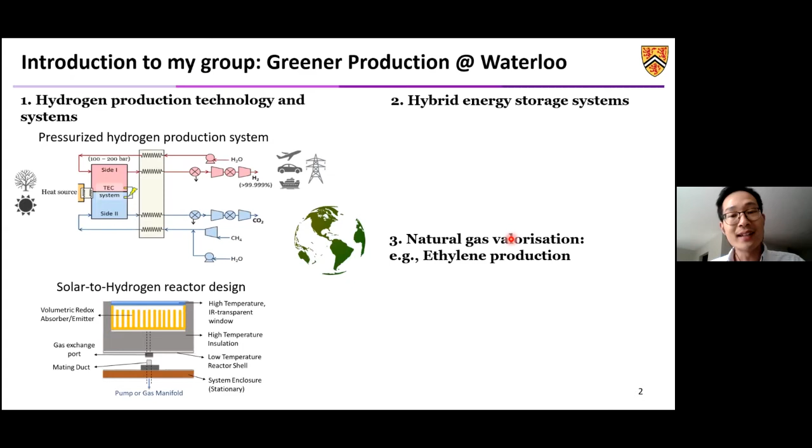And another topic that we are currently working on is hydrogen and hybrid energy storage systems. In this project, we are looking at using a hybrid storage solution combining battery and hydrogen to store variable renewables, for example, solar and wind, so that we can stabilize the grid as well as provide greener solutions for the consumers. And the third topic that we are working on is natural gas valorization. In this topic, for example, we are converting natural gas into ethylene so that we can decrease the energy consumption as well as increase the selectivity for ethylene production using methane oxidative coupling in a membrane reactor.

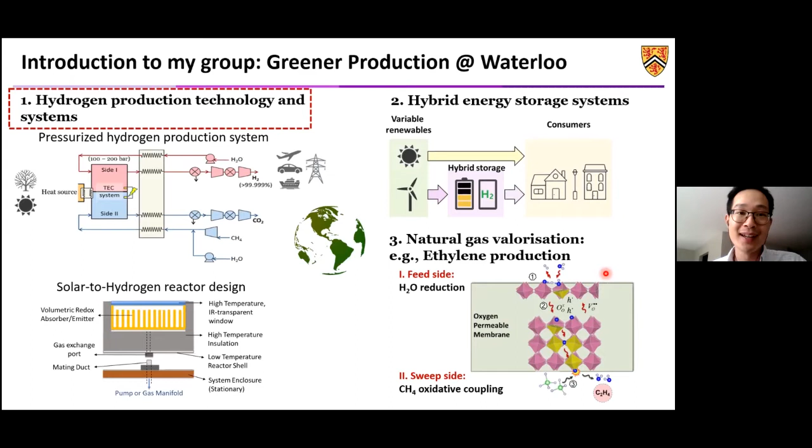In today's talk, we're focusing on the first topic, which is the hydrogen production technology and system, and I'll tell you more about how we use an oxygen permeable membrane to enhance hydrogen production from water. Why are we talking about hydrogen these days? Because more and more attention is now on hydrogen. Recently, if you're following the energy news, you know that Germany will release this 9 billion euro plan to use hydrogen to recover their economy. And also in the US and in Europe, they are developing hydrogen strategies or hydrogen roadmaps for economic development.

And in Canada, we are also developing a national hydrogen strategy, which could be different from the US because the US is looking at hydrogen from their coal. But here in Canada, we have a lot of renewable electricity, and we also have a lot of fossil energy. So that will be a great chance for us to use these energy resources to produce hydrogen for the economy. However, hydrogen's role as an energy carrier is not a very new topic. It's more than 100 years old.

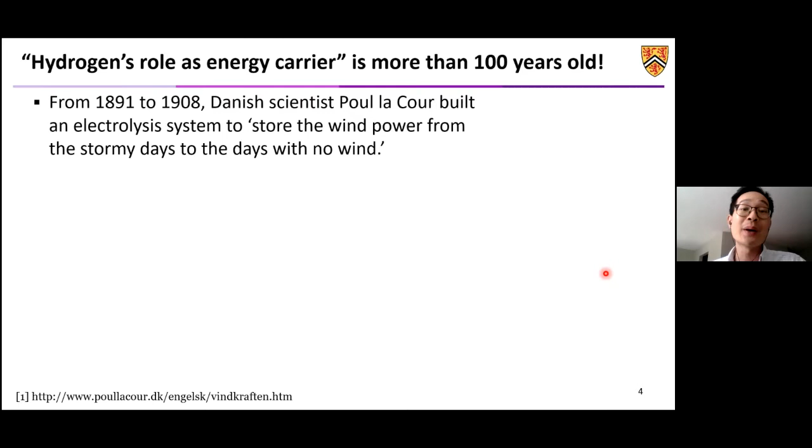From the 1900s, the Danish scientist Poul la Cour was actually the first one to build an electrolysis system to store wind power on stormy days so that they could use this hydrogen to power some systems on days without wind. Here is a historic photograph of this electrolysis cell in the basement below a wind turbine. 10 of these tubs were built. On a windy day, they could produce around 1,000 liters of hydrogen and 500 liters of oxygen per hour. That is around a 3 to 4 kilowatt system that was built in Denmark.

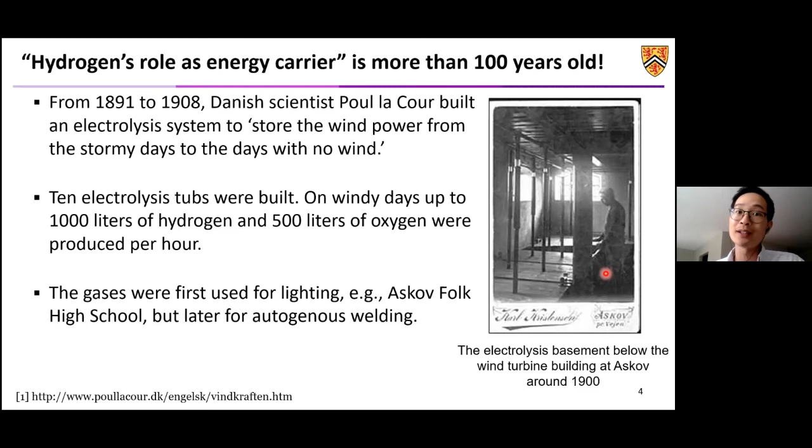And these gases were stored and then used, for example, in lighting, which is commercial use, as well as for welding. So they could use this stored hydrogen for commercial energy supply as well as industry. This inspired a British scientist called Haldane, who hypothesized a new type of system with different power stations located at suitable distances, so they could convert the excess wind energy to hydrogen, store the hydrogen in these power stations, and then convert it back into electricity when there's no wind.

And this further inspired another professor in the US, who was the first one to use the term hydrogen economy in the 1970s. Professor Bockris at TAMU in the United States envisioned that the US could be supplied solely by solar energy with hydrogen storage.

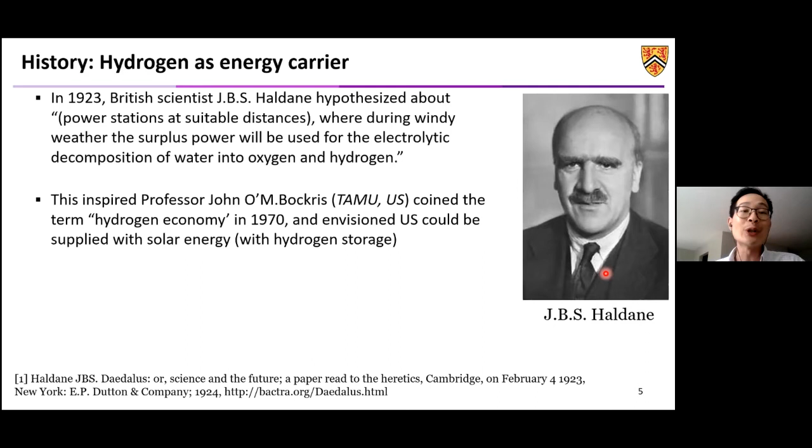From that time on, we know more about hydrogen in the energy carrying industry as well as different renewable energies industry. So that's why there are more and more hydrogen products coming to the market. For example, Germany in the 1990s actually had the first solar power hydrogen production plants. And later we see hydrogen fuel cell cars as well as hydrogen fuel cell buses running around the globe. And also in 1999, Europe had the first hydrogen fueling station in Germany.

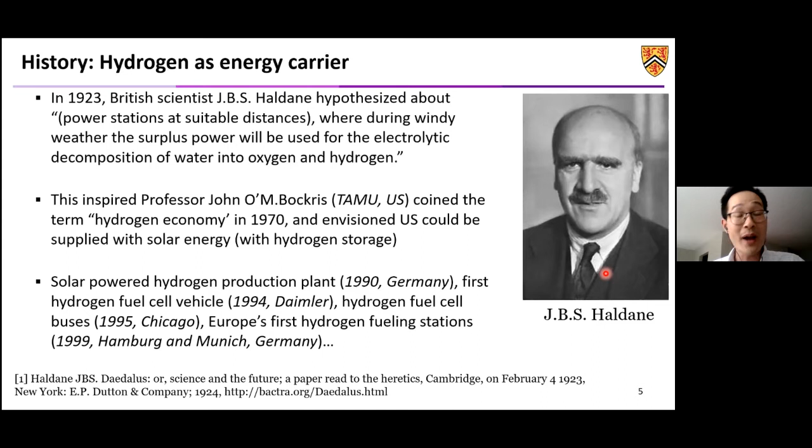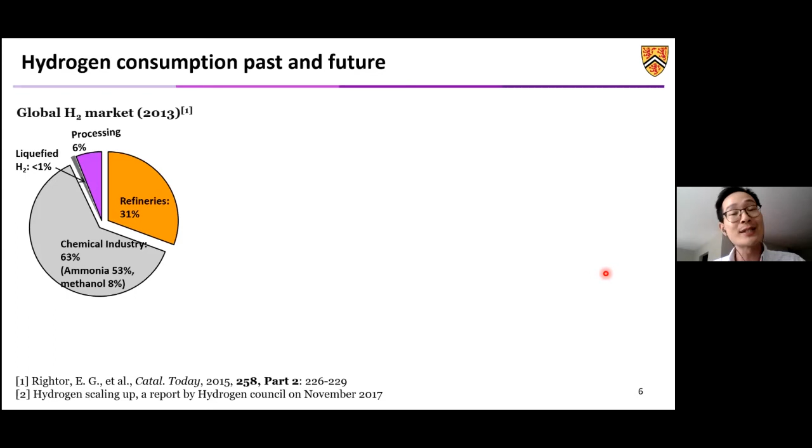However, since we're talking a lot more about renewable hydrogen these days, people envision that in the near future, 30 years from now, the hydrogen market can increase around 8 times, from 10 exajoule to around 80 exajoule. Hydrogen can be used for power generation, energy storage, transportation, for example fuel cell cars, trucks, trains, etc. And also to provide energy for industry, for buildings, as well as new feedstocks for advanced technologies in the chemical industry. So there is great potential for hydrogen in this market in the near future.

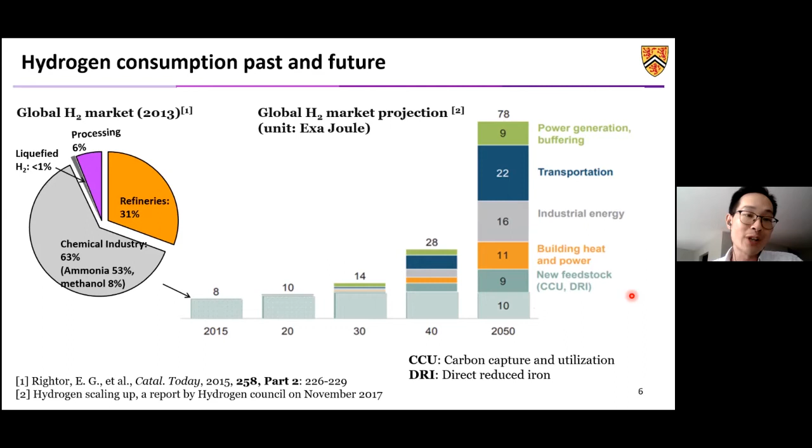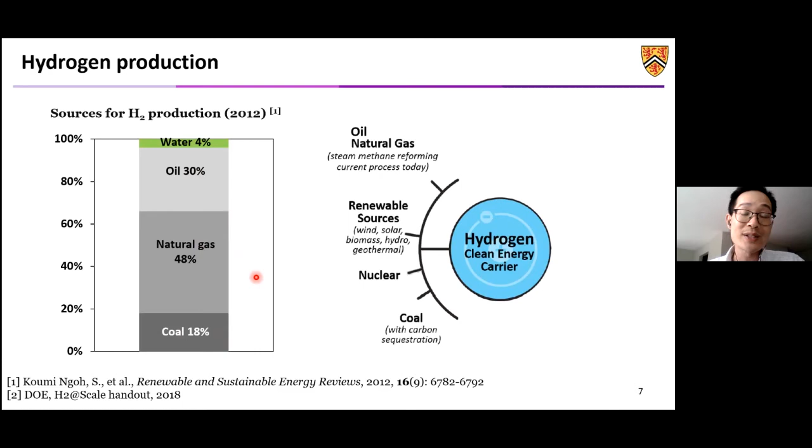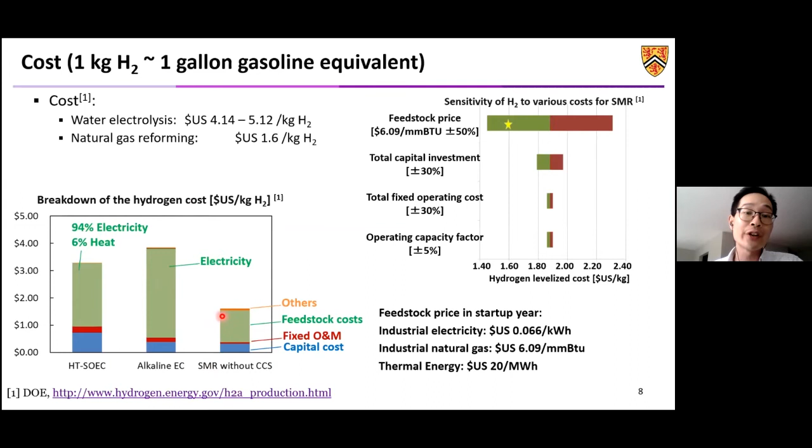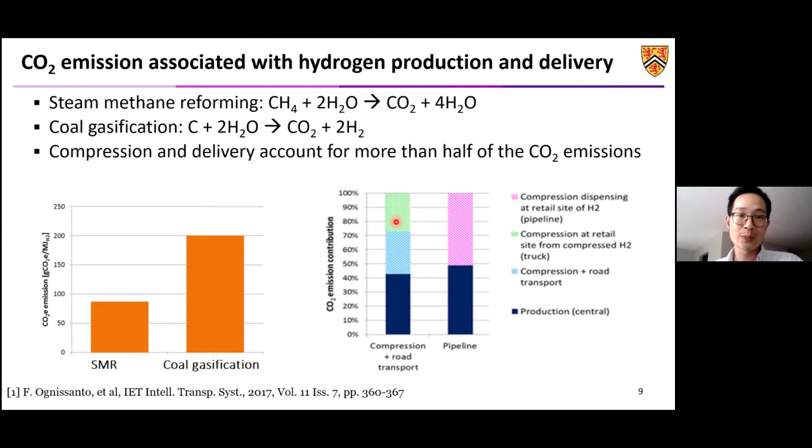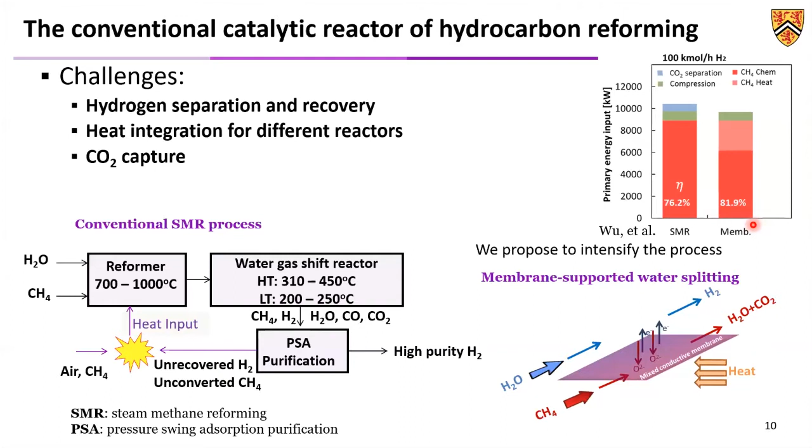We did some analysis to compare these two processes for hydrogen production, which is shown in this graph. Here you can see that by process intensification in this membrane, we can actually increase the efficiency from 76% to 82%, which is a 6 percentage point increase. So you might be wondering, what is this magical membrane? So now let's zoom in to look at this membrane.

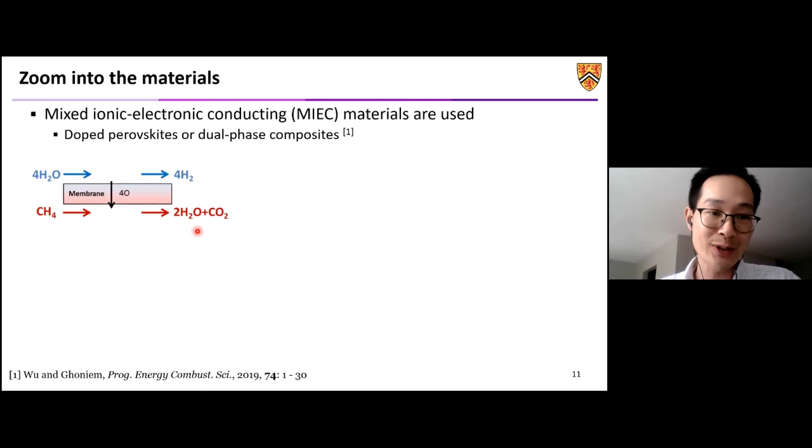This membrane that we're using is a mixed ionic electronic conducting material, which is usually doped perovskites or dual phase composites. So here's the process again: we have water producing hydrogen and oxygen. Oxygen diffuses through this membrane and then reacts with the methane to produce water and CO2. If you look at this membrane, it's actually a dense membrane, so there are no pores. That's why we can achieve very high selectivity of oxygen permeation. Only oxygen can permeate through this dense membrane in the form of oxygen ions.

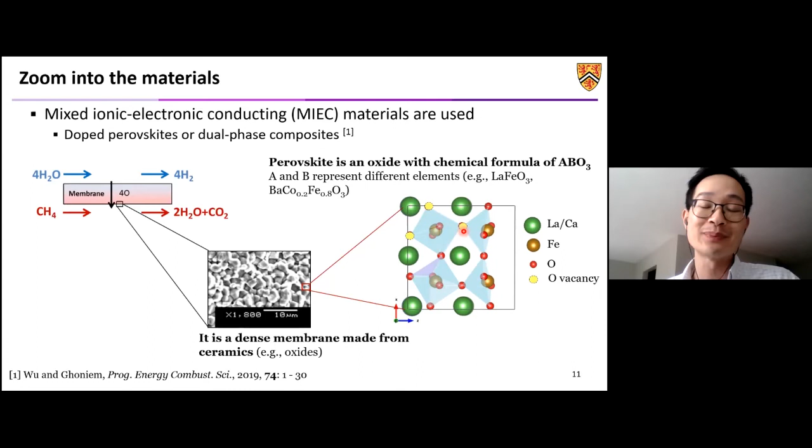If you look at the entire process, we can separate it into 5 different steps. The first step is that water vapor diffuses to the surface of the membrane. After that, the oxygen from the water reacts with the oxygen vacancies to form lattice oxygen, while the hydrogen is produced on this side and diffuses away from the surface. Once the lattice oxygen is formed, it diffuses through this membrane to the other side, driven by the chemical potential gradient, by hopping from one vacancy site to the other.

After that, this oxygen reacts with the methane to form CO2 and water, and that's when we can capture the CO2 very easily from the methane side. As I mentioned, this process is driven by the chemical potential gradient. On the water side, we have very high chemical potential, with high partial pressure of oxygen. On the methane side, we have very low chemical potential and a very low partial pressure of oxygen. Because of this, the oxygen vacancies diffuse through this membrane from the sweep side to the feed side, while the lattice oxygen diffuses from the feed side to the sweep side.

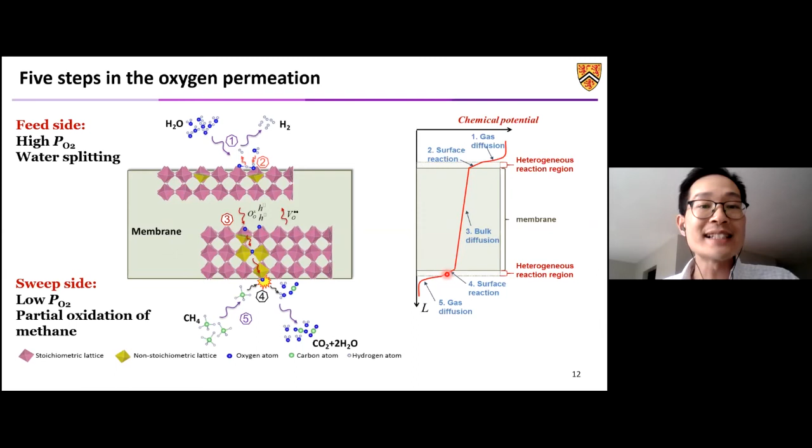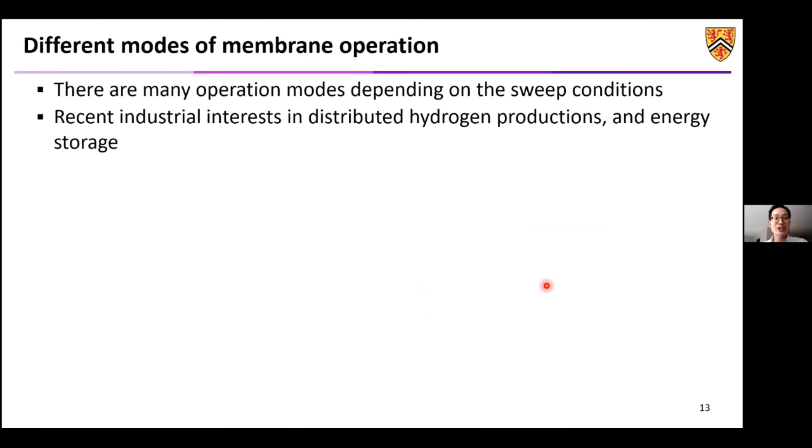So this is how it works in this membrane reactor. And since this is an oxygen permeable membrane, actually there are different types of operation modes depending on the sweep side. And it can be applied, for example, into distributed hydrogen production or as an energy storage technology.

So the first mode is the hydrogen-oxygen production. In this case, we have hydrogen, which is produced from water splitting. The oxygen diffuses through this membrane, and this is driven by a vacuum. So we lower the partial pressure of the sweep side by using a vacuum, so we drive the oxygen to diffuse from the water side to the oxygen side. So in this case, we can produce hydrogen and oxygen.

And if you don't want to use a vacuum because sometimes it's too energy intensive, you can also use an inert gas, for example, CO2 or another type of inert gas. You can use this as a sweep gas to sweep away the oxygen from the membrane surface to create a low partial pressure on that side for the diffusion. And again, this is also a hydrogen and oxygen production mode.

And also, since we have an oxygen source, we can control the oxygen partial pressure, and we can control the oxygen flux to react with the methane so that we partially oxidize this methane into hydrogen and CO, which is the syngas, to further produce methanol, for example. And in this case, we can co-produce hydrogen and syngas in this membrane.

And if you just want hydrogen, you can fully oxidize this methane by continuing flowing this methane and continuing utilizing this oxygen. So in this case, you can see that for 1 mole of methane, we can produce 4 moles of hydrogen, pure hydrogen from the water side. And then the methane is fully oxidized, and we can capture the CO2 from the methane in this case.

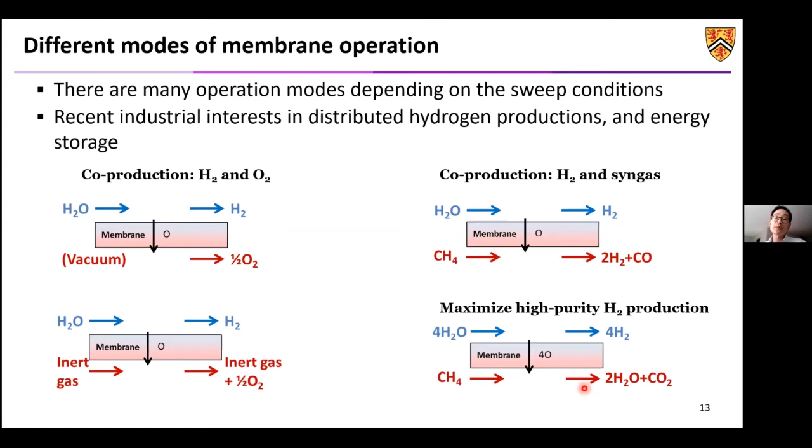And since we are utilizing this as a fuel or as a reactant that will react with the oxygen, we can use different types of fuels. For example, in this talk, I'm going to talk more about how we integrate this with coal gasification plants to utilize the gasification product, which is syngas, and to produce high purity hydrogen in this mode.

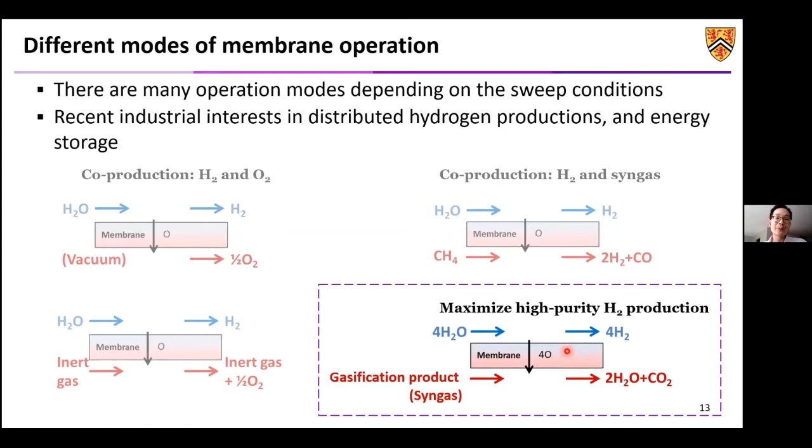So before we move on, I'll first introduce the gasification plant and what it is. Here it shows a schematic of the integrated gasification combined cycle, IGCC, plant with carbon capture. This is a clean technology to utilize coal, where we can capture the CO2 in a more efficient manner. And here the schematic shows that we have coal slurry that is fed into the gasifier to produce the raw gas at high temperature and high pressure.

And the raw gas is a mixture of very different gases, but it's very reducing. You can see that 35% of this is CO and 34% of this is hydrogen, and also some impurities from the coal. And after that, this raw gas will be cooled down, and then the dust will be separated and it will be fed into a water gas shift reactor to increase the hydrogen production.

And after that, the CO2 will be separated by this two-stage Selexol process for the CO2 compressor, and also the hydrogen sulfide from the process will be separated to produce sulfur in the Claus plant. So after this Selexol process, we have a clean stream of hydrogen, which will be fed into the combined cycle. So we'll have a gas turbine running at high temperature, and then we'll use a heat exchanger to run the bottoming Rankine cycle so that we can increase the efficiency of the entire coal power plant.

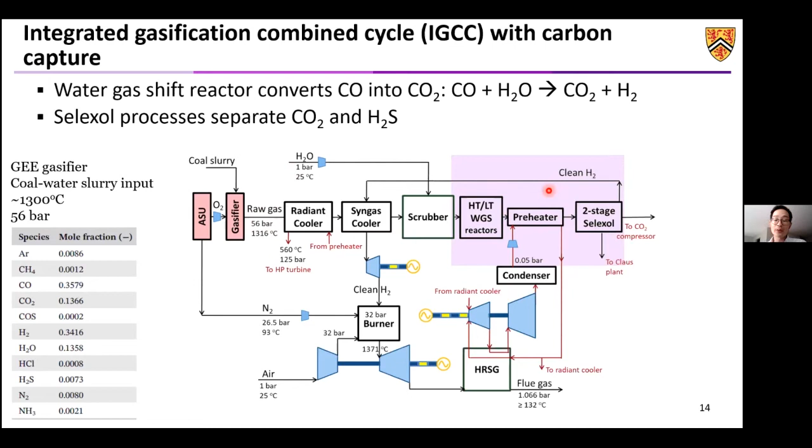So in order to improve the efficiency, especially for hydrogen separation from CO2, we propose to use this membrane. So in this case, we have this oxygen membrane reactor. On one side, we have the water splitting to produce hydrogen. And on the other side, we use the gasification product, syngas, as the fuel so that we can consume the oxygen, and we can drive more hydrogen production.

And because we know that coal gasification has a lot of impurities, such as H2S, the membrane has to resist this type of poisonous impurities from the gasification products.

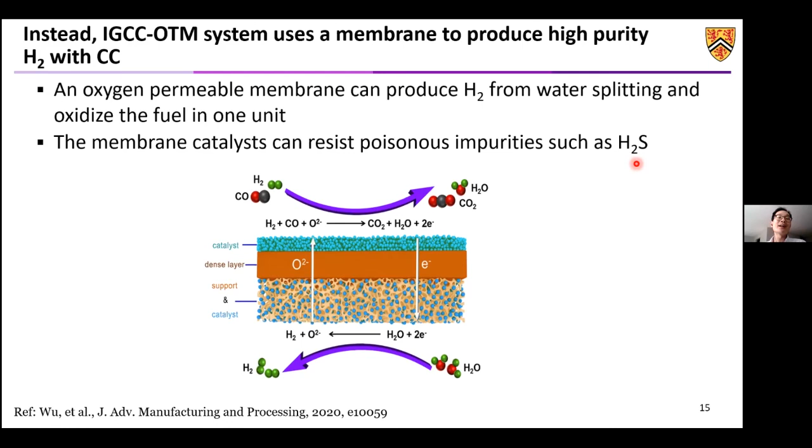So what it looks like in a system, it looks like this. In this case, we have this high temperature raw gas from the gasifier. It will go to this high temperature membrane reactor so that we can utilize the heat integration from the high temperature gasifier to the high temperature membrane.

Using this membrane, we can use the syngas from the gasification to produce water or produce hydrogen from water splitting. On side 2, the water splitting side, we produce pure hydrogen with water as a mixture. On side 1, we have the syngas reaction. The only addition to the plant is this isothermal high temperature membrane reactor, and also some post-processing units to increase the efficiency for the plant.

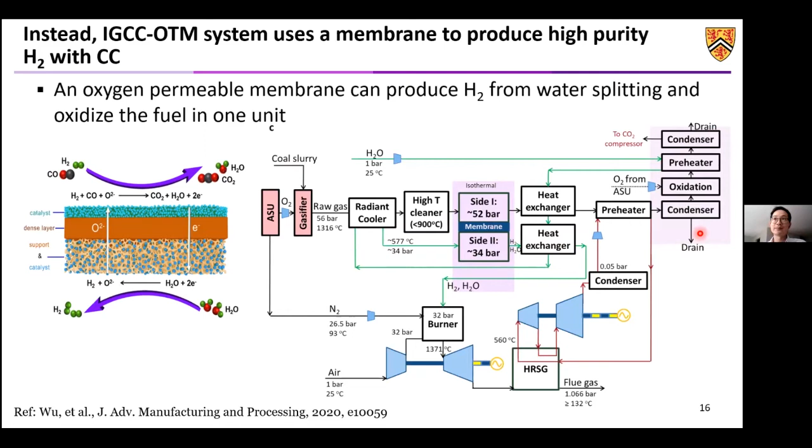So we use the counterflow configuration to maximize the conversion of this hydrogen. This is what we mean by counterflow: the syngas flows from the left to the right, but the water flows from the right to the left. The reason we want to use this counterflow is because, as I mentioned earlier, this process is driven by the potential gradients across this membrane. That's why we will have high oxygen partial pressure on side 2 and low partial pressure on side 1.

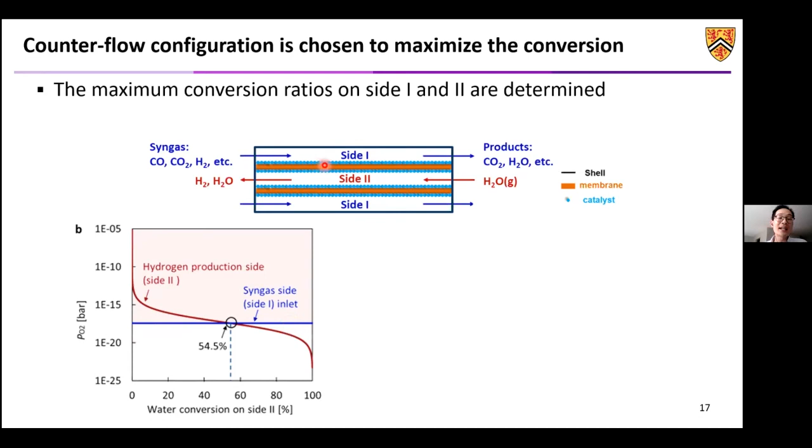The lowest partial pressure of oxygen on side 1 is at the inlet, which is plotted here. In order to make this membrane work, the side 2 partial pressure has to be above this blue line, so it has to be in this shaded region. We also know that when water is splitting, we are producing hydrogen, so the partial pressure of oxygen actually drops when the water is split. That's why we can decide what is the maximum water splitting ratio in our membrane reactor, which is around 55%.

On the other side, it's very similar. The maximum partial pressure is at the inlet on the water side, and the lower partial pressure is from the syngas side. But when the syngas is oxidized, the partial pressure of oxygen increases, as shown here. However, we can see that even though we have almost full conversion of the syngas into CO2 and water, we still have a potential gradient. That's why the syngas conversion ratio can be very high, as high as 99%.

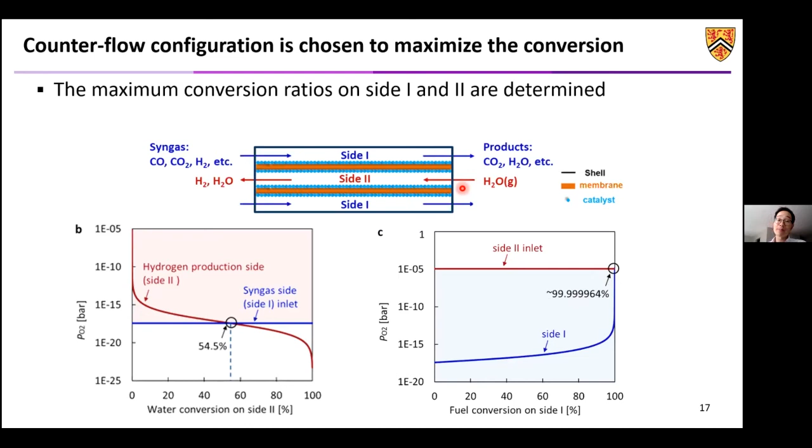After we know the maximum conversion in our reactor, we can build a model for this system. So we use Aspen to build this model to evaluate the performance of this new cycle. We define the first law efficiency of this plant as the net work output of the plant, electric output of the plant, over the heating value of the coal. The net work output is defined as all the work produced by the turbo machinery minus all the auxiliary consumption, such as pumps, CO2 compression, oxygen separation, the Selexol separation process, etc.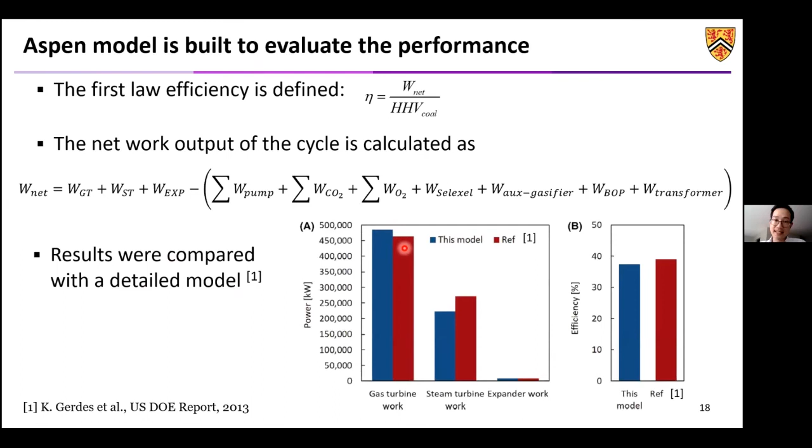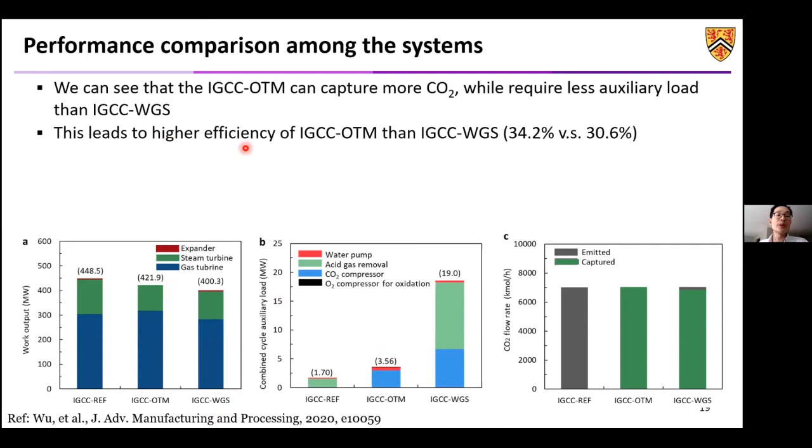That's why we can improve the efficiency of our plant. Also, because we decreased our auxiliary loads, our net work output compared with the conventional IGCC with CO2 capture can increase. That's why we can increase our efficiency from 30.6% to 34.2%.

We also calculate the energy consumption for CO2 avoided in our plant. We can see that our new designed IGCC OTM has an energy consumption almost 60% lower than the conventional IGCC with water gas shift reactor for CO2 capture. These results again convince us that this new design is actually working. We can utilize this IGCC OTM process to increase our electricity output, even when we are capturing the CO2.

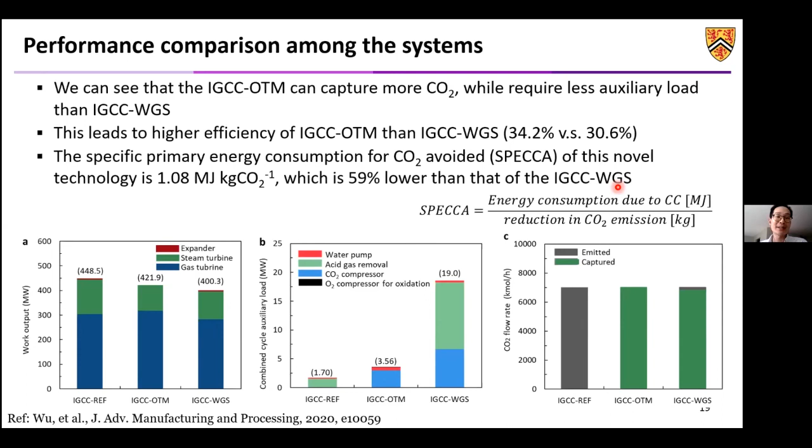Then you might be wondering whether this membrane actually works in reality. That's why in the lab we designed this type of membrane and tested it in a very similar environment, so that it can be very stable even though the environment is very reducing as well as corrosive.

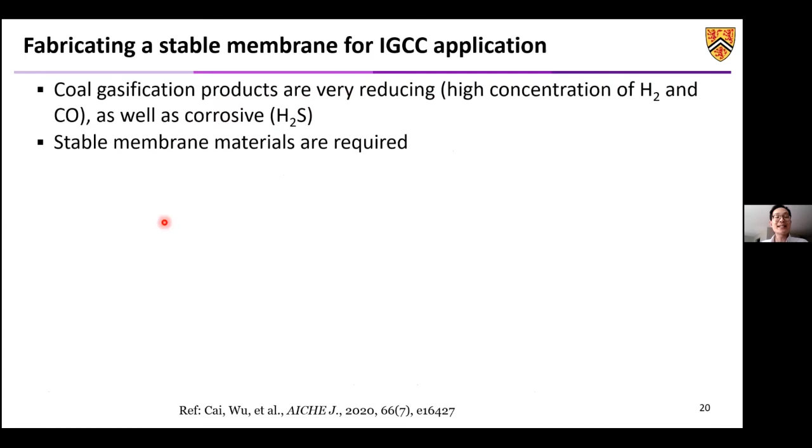We designed the membrane material, which is a dual phase membrane material. The chemical formula is shown here. If you look at a microscopic image of the membrane, you can see that it is very thin, about 36 micrometers.

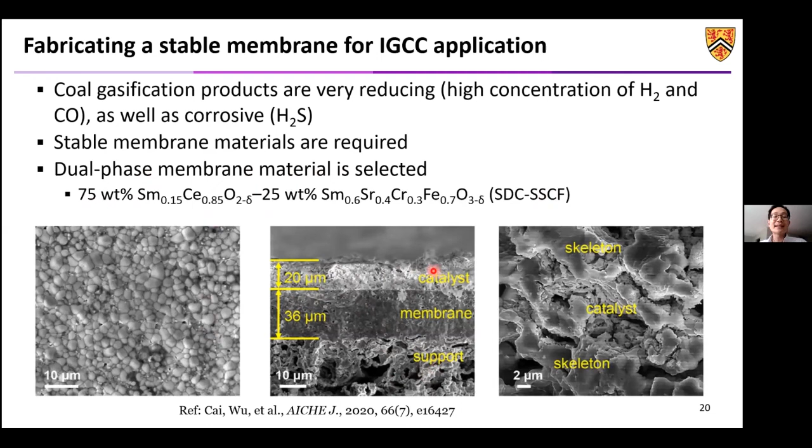We have a catalyst on top of this membrane to enhance the reaction rates, and also a support. Because this membrane is very thin, we have to have a mechanical support so that we can increase its mechanical strength. The catalyst is shown in the next slide.

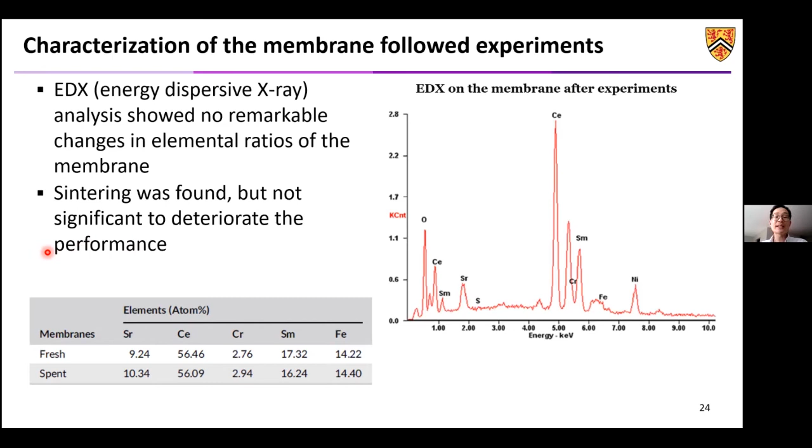This membrane can be chemically very stable even under this very reducing, very harsh gasification environment. We did observe some sintering, which is prevalent in high temperature processes. However, since our performance is very stable, even though we found some sintering in the catalyst, the performance does not deteriorate remarkably. This confirms that the membrane design is very stable under the harsh environment in the gasifier.

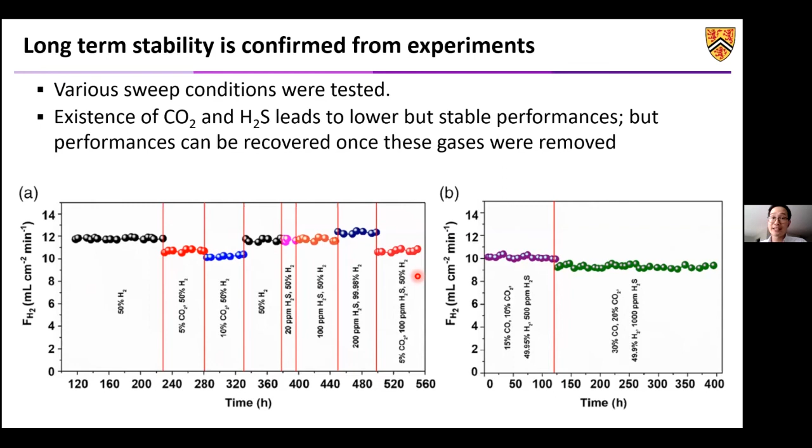So to summarize, I introduced this type of oxygen transport membrane to produce hydrogen, and we used this IGCC application as an example to show how we can use this OTM process to increase efficiency and decrease the energy penalty for CO2 capture.

I also showed that we experimentally fabricated this dual phase membrane in the lab using non-precious metal catalysts, so the cost of the membrane is low, and this type of membrane can perform very stably under very harsh environments in the gasifier.

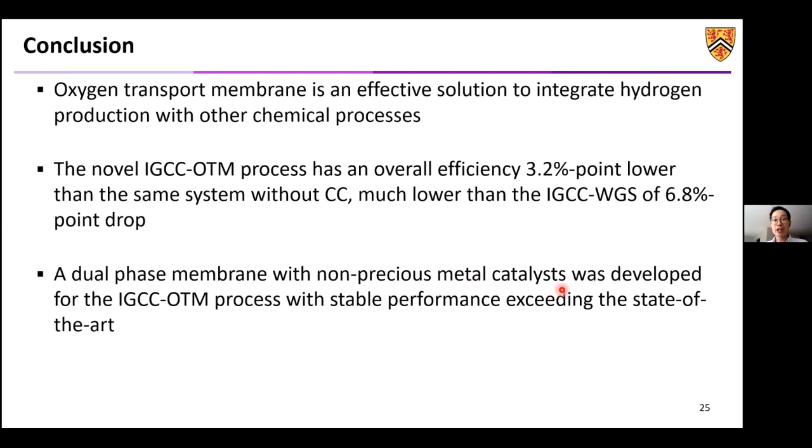So I would like to thank my collaborators for this work, Dr. Cai Li, Professor Zhu Xuefeng and Yang Weishen at the Dalian Institute of Chemical Physics, and also Professor Ahmed Ghoniem at MIT, who also contributed to this work. The Aspen software for this study was supplied by Aspen Technology, and the financial support is the Excellent Cooperation program.

Thank you very much for your attention. I'd love to take any questions if you have.

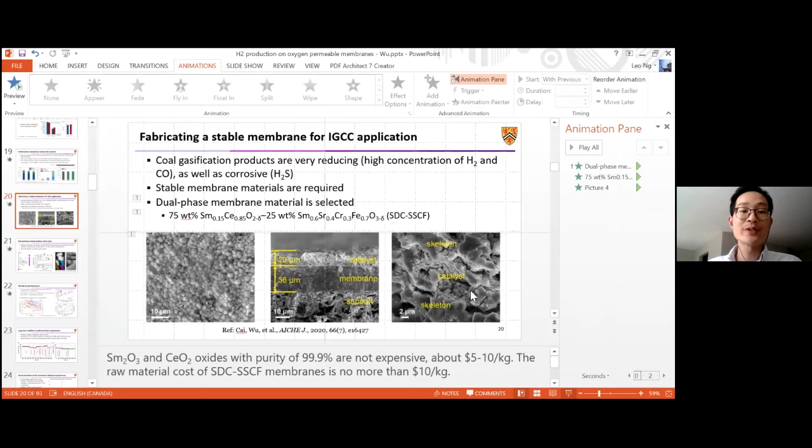So the membrane that we're using is this type of dual phase membrane. We're not using a very expensive metal, so actually the source of these metals is very cheap, but the manufacturing process is more expensive at this moment because it's not scaled up. So we're working with Dalian to scale up this process so we can decrease the production cost of this membrane, in order to commercialize it.

So Dalian has a partnership with the University of Waterloo to explore production of the membrane? We are exploring that, yeah. They have equipment on site that can produce these membranes at medium scale actually.

I would love to talk further, maybe off this webinar, and see if there are opportunities for us to collaborate with your work for some applications in Ontario. Yeah, sounds good, I would love to do that. Okay, thank you very much.

Any more questions we have? I guess I have a quick question, if that's okay. Please go ahead. Thank you, Professor, that was such a good talk.

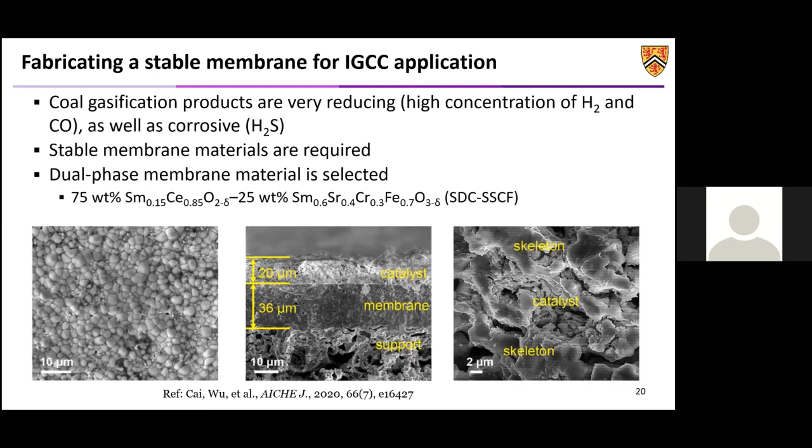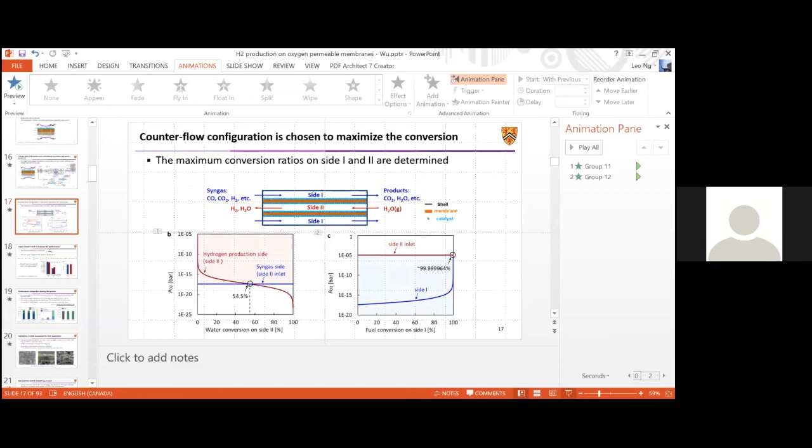I just have a quick question about the counterflow configuration that you talked about. I wonder if that counterflow configuration can be used for other applications like the production of ethylene as well as hydrogen, or is that specifically for the IGCC application?

Yeah, so thank you for the question. This configuration can be used in any membrane reactor. The reason we want this type of configuration is to make good use of the chemical potential across the membrane, so that we can increase the conversion on the water side as well as the conversion on the fuel side. But yes, it can be used in different types of applications.

Thank you, sir. Thank you. Yeah, any more questions? I guess we don't have any more questions.